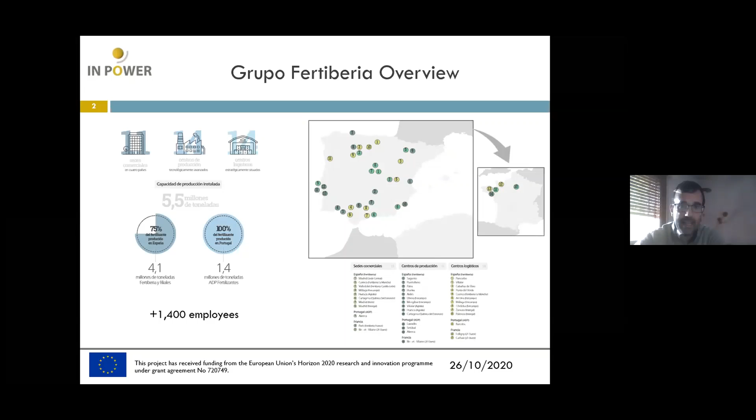We are more than 1,400 employees, and as I said before, our core business is fertilizers and nitrates, mainly nitrates. About this, I'm going to present the production facility that is more related with this project. Química del Estroncio is located in the south of Spain, in Cartagena, on the Mediterranean Sea. This is a multi-product factory that can produce more than 50,000 metric tons per year.

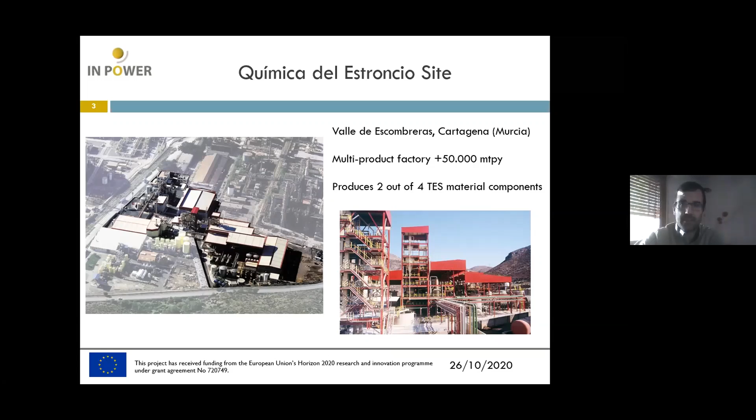And we can produce any kind of nitrates, from calcium nitrate to potassium nitrate, ammonium nitrate, etc., and all types of grades. One of our star products is for microelectronics, and it's more than three nines purity. So we are able to produce very fine chemicals also on an industrial scale. So it's a nice and interesting facility. And the reason I'm presenting this is because 2 out of the 4 TES material components were produced in this factory.

Okay, Fertiberia's role in IN POWER is the high thermal capacity materials for thermal storage work package leader. We work along with CEA and ENEA, and testing and validation work package partner that was led by ENEA. In this work package, there were 3 main objectives: the selection of high thermal capacity and robust TES materials, so to speak, the development of new TES materials apart from the well-known solar salt or other compositions that are commercial and that we all know have several drawbacks.

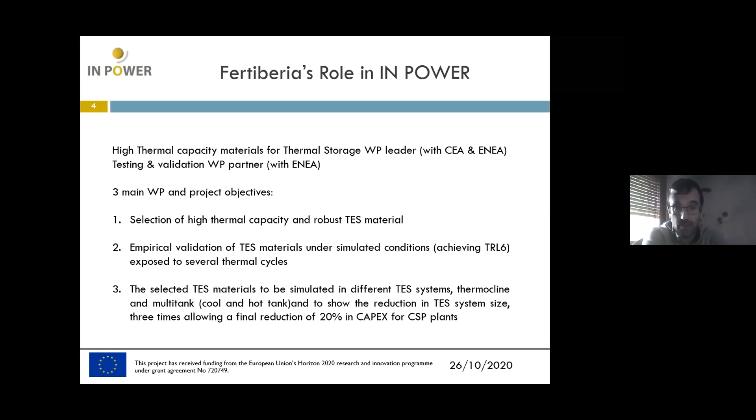Also, the empirical validation of TES materials under simulated conditions, achieving TRL 6, that was foreseen to be done in ENEA. And this TES material simulated in different TES systems, thermocline and multi-tank, that were developed by CEA. To show the reduction in the TES system and allowing a final reduction of about 20% in CAPEX. As you know, the thermal energy storage system is one of the most expensive parts of a CSP plant.

As I look at the participants in this workshop, I think everyone knows this concept. All of you know the thermal energy storage, along with the solar field and the power block, are the main parts of a CSP plant. Also, these materials are the basic component in the thermal energy storage that stores the energy from the solar field in a direct or indirect way, let's say if there exists a heat transfer fluid that transports the energy to the thermal energy storage.

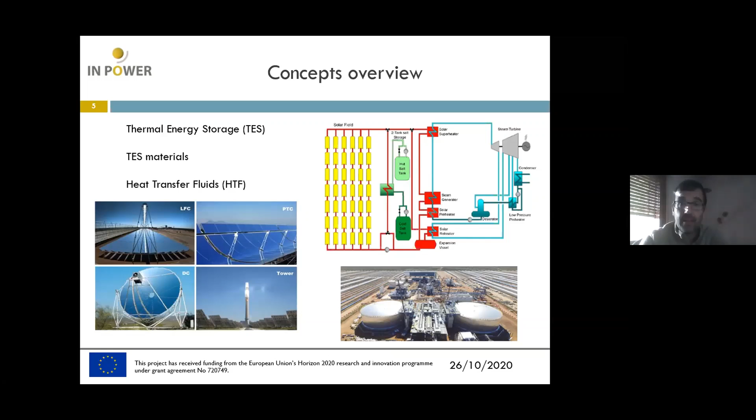Okay, we can review briefly the state-of-the-art materials. As you know, the main TES material is solar salt, which is a non-eutectic composition with a fusion temperature of 240 degrees, and the operational range is about 280 to 380 degrees in the case of indirect systems, or in direct systems up to 565 degrees.

On the other hand, HTF materials: thermal oils that are based on diphenyl ether and biphenyl mixtures. I think we all know these thermal materials, which are the most used materials in this field. One of their main drawbacks is their temperature stability, lower than 400 degrees, and that they are toxic and not environmentally friendly.

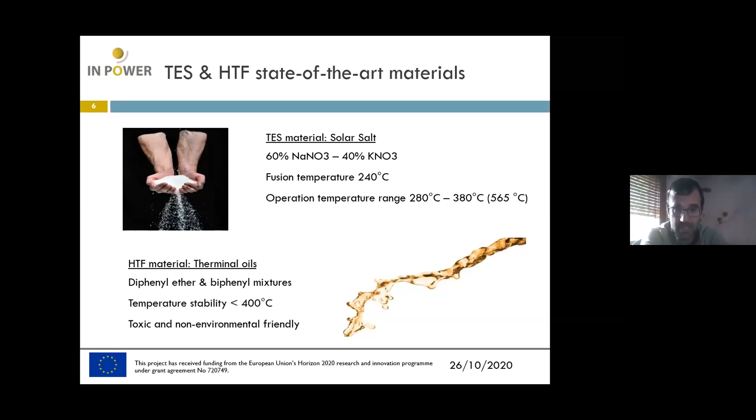So there are different objectives and different ways to enhance the performance of these materials, and here you can see some of them listed. The increase in the temperature range is very interesting because as long as you keep increasing the temperature range, the efficiency of the power block also increases. So an ideal material would be one that can operate from about 100 degrees to 600 degrees.

Also, the physical-chemical properties enhancement is another field to improve these materials, mainly in terms of specific heat capacity by different compositions of the material, or also by the addition of nanoparticles and making nanofluids. It has been demonstrated that it can be a new way to enhance this property.

Also, density is another property, probably less known, but very important, because along with the Cp it gives you the energy density. So it's of main interest to increase this indicator. So it's also very interesting to have a high density material if possible.

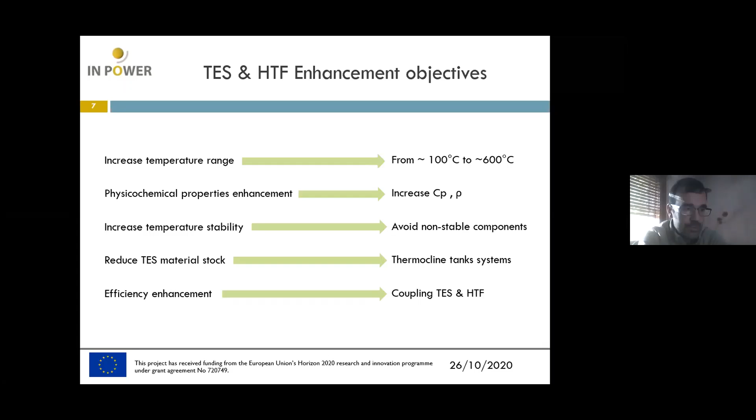Also, with thermocline tank systems, it can be reduced because you have only one tank, not two tanks. So that's another CAPEX reduction. And to finish this slide, you have also the efficiency enhancement by coupling thermal energy storage and HTF, and to promote direct systems over indirect systems. Okay.

Starting with the selection and optimization of these materials, we have to work with the CALPHAD method. It's a thermodynamical method that uses experimental information, empirical rules, and fundamental theory to model thermodynamic properties of each phase of the system. In our case, we worked with four components, 4 nitrates, and four different phases: liquid phases and other solid phases.

So we modeled the Gibbs energy of these phases with model parameters that are available in different thermodynamical software. And we predict the behavior and the phase diagrams of all these components: 6 binary diagrams, 4 ternary diagrams, and 1 quaternary diagram.

To detect the best composition, we were always looking for the eutectic composition, that is, given any mixture of n components, the eutectic composition is the minimum temperature composition of all the system. And it also behaves as a pure component. It's not like solar salt that, as you know, starts melting but part of it remains solid. So a eutectic composition at melting temperature will all become liquid.

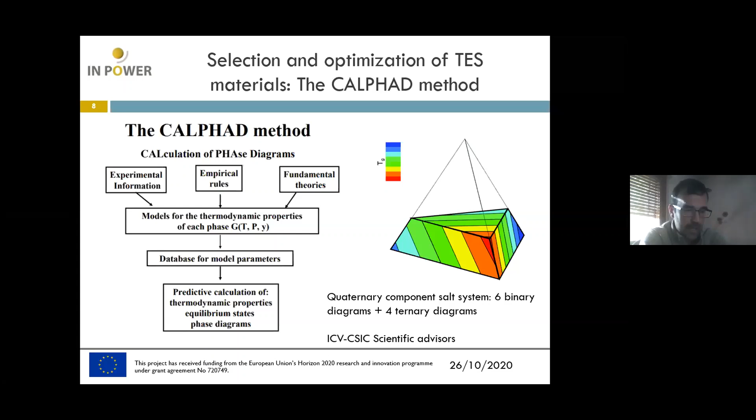So this is also useful in terms of local low temperatures that don't unplug the system due to local solidifications, and it seems to be a good approach. As I said, we developed this model for a 4-component system material based on alkaline and alkaline earth nitrates.

Mainly, we started our work with solar salt, and we started adding other components and seeing if we can enhance the melting temperature and also other parameters. We used Thermo-Calc and FactSage software and databases, and we successfully developed all the system, and we could assess all the phase diagrams that are part of the system.

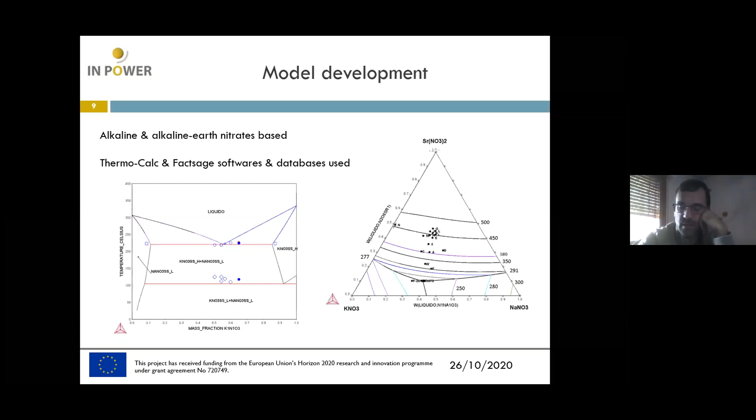Here in this slide, you can see the well-known sodium potassium nitrate phase diagram, and on the right you can see one of the ternary diagrams with strontium nitrate, which was one of the other materials of the quaternary system. And in this case, for this ternary diagram, the eutectic melting temperature was about 210 degrees. This thermodynamic assessment cannot be done without experimental studies.

Mainly differential thermal analysis and X-ray diffraction studies to determine the phase diagram shape and the minimum temperature compositions. The endothermic peaks of the DTA give you the information of what is the liquidus or the solidus of a given composition, and on the other hand, the XRD graphs can give you the present phases in the solid state. So in terms of modelization, this can be used to tune the model developed in CALPHAD, to give a more robust model, and to give good results in the final case.

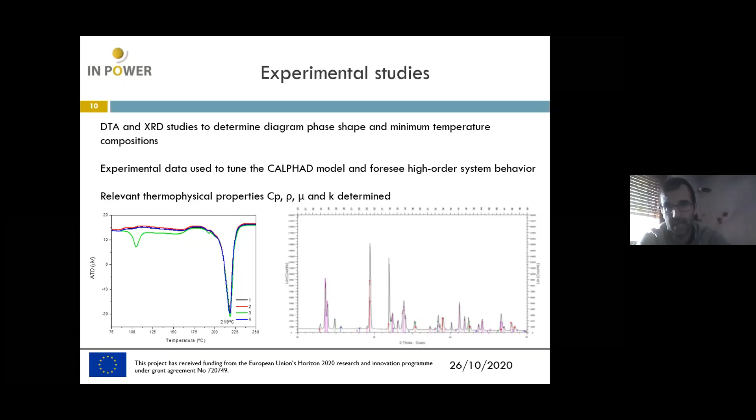Other thermophysical properties, so to speak, Cp, density, viscosity, and thermal conductivity were determined by experimental means. Also, talking about corrosion studies, the addition of new components to the system can be tricky, because these new components can be more corrosive to the conventional materials used in this technology. So we tested about 2,000 hours with one of the compositions at 425 degrees, and almost 5,500 hours with the other composition at high temperature, to test 6 different conventional steels.

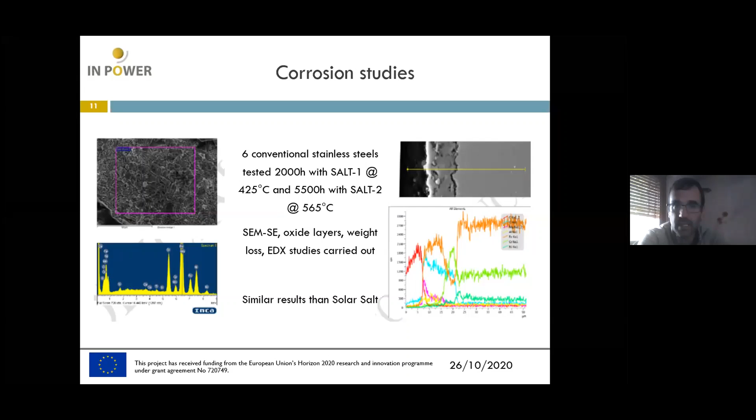For example, AISI 304, 316, 316 with titanium, 321, and so on. And we also developed SEM studies, oxide layer behavior, we determined weight loss, and EDX studies, all well carried out. And the results for those temperatures, the more aggressive conditions for the two salts, were similar to those obtained for solar salt. So we expect the same corrosion behavior in any conventional steel as for the solar salt. So one of the problems was avoided. We can use these compositions without problem in conventional stainless steels.

It's true that for salt one at low temperatures it is greater, but it remains in the same ranges as Hitec, for example. So we're talking about a composition that can substitute Hitec. So it's a good candidate. And finally, in terms of CAPEX, the first salt, it's true that it's more expensive, but in the same rates as Hitec. And on the other hand, the other salt is about 10% cheaper. So in the future, it can be another candidate to substitute the solar salt.

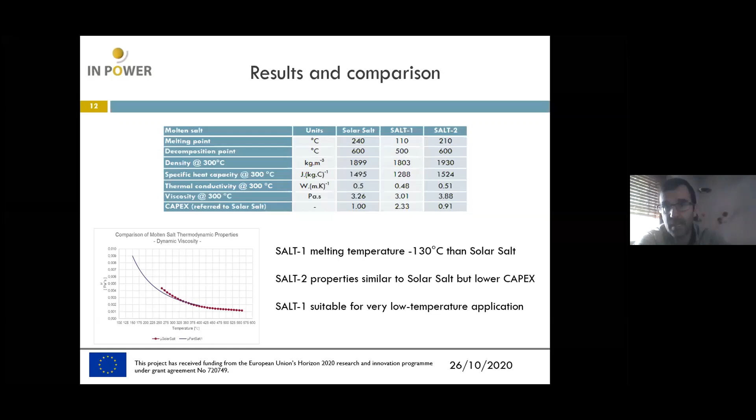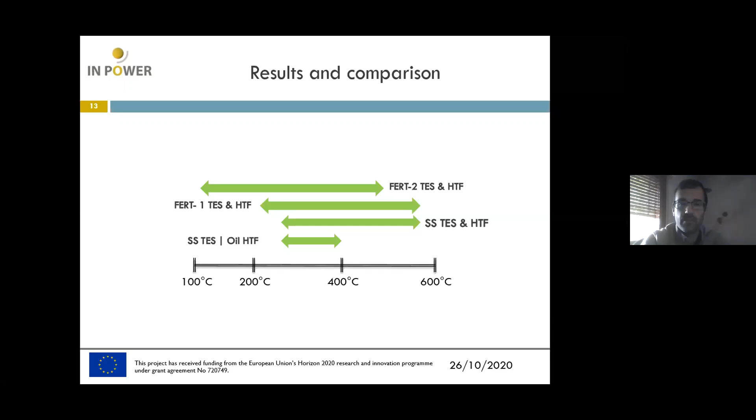So finally, to compare in a graphical way, you can see the temperature range in an indirect system with solar salt and oil. Then in a direct system with solar salt, and with the salt as also a direct system, we can increase the gap a bit. And in the case of the other salt, we can see that we can reach very low temperatures while only decreasing the high temperature by about 100 degrees. So for certain applications, this salt can be studied and considered to be installed. And okay, this is all.

We can sum up all this work in a few sentences. We have developed two high thermal capacity and robust TES materials. We proved that CALPHAD methodology and DTA and XRD studies are the best way to develop new materials. It can be used without a lot of cost and time, and you can do many things in the best way. Also, the enhancement of CAPEX was achieved, along with the operational temperature ranges and thermophysical properties.

Also, the corrosion behavior is similar to standard TES materials, so there is no need to install different materials for this application. So we have here the potential to substitute the solar salt directly with one of the compositions developed here and keep working without any problems.